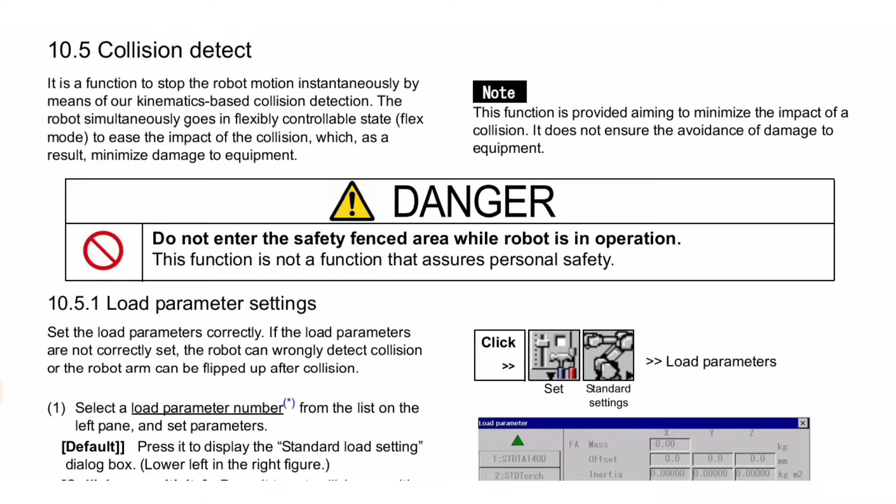Note: this function is provided aiming to minimize the impact of a collision. It does not ensure the avoidance of damage to equipment. Danger: do not enter the safety fenced area while the robot is in operation. This function is not a function that assures personal safety.

Next is load parameter settings. Set the load parameters correctly. If the load parameters are not correctly set, the robot can wrongly detect a collision, or the robot arm can be flipped up after collision. First, select a load parameter number from the list on the left pane and set parameters. Default: press it to display the standard load setting dialog box, lower left in the right figure.

Collision sensitivity: press it to set collision sensitivity, setting range 0.0 to 100%, 100% for the most sensitive level. Second, set parameters and click OK. Note: setting the collision sensitivity higher not only increases the collision detect sensitivity but also increases the flexibility of the flex mode after collision. Therefore, distortion of equipment caused by the collision can be relieved.

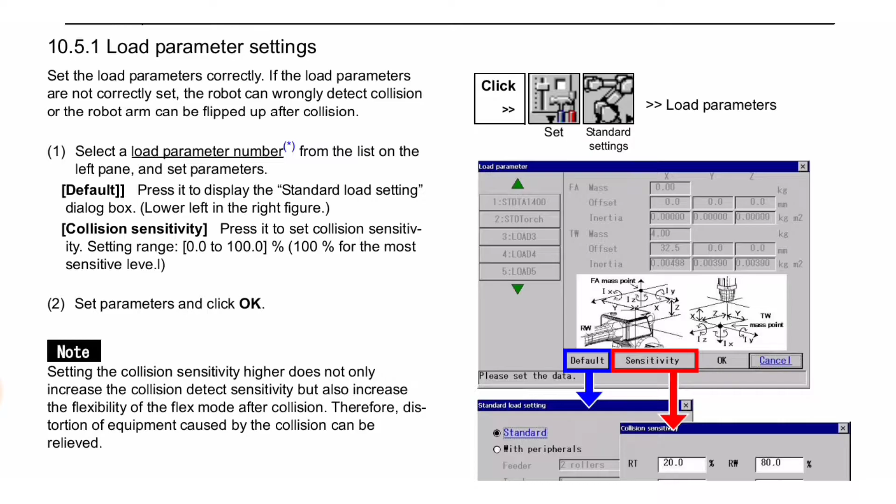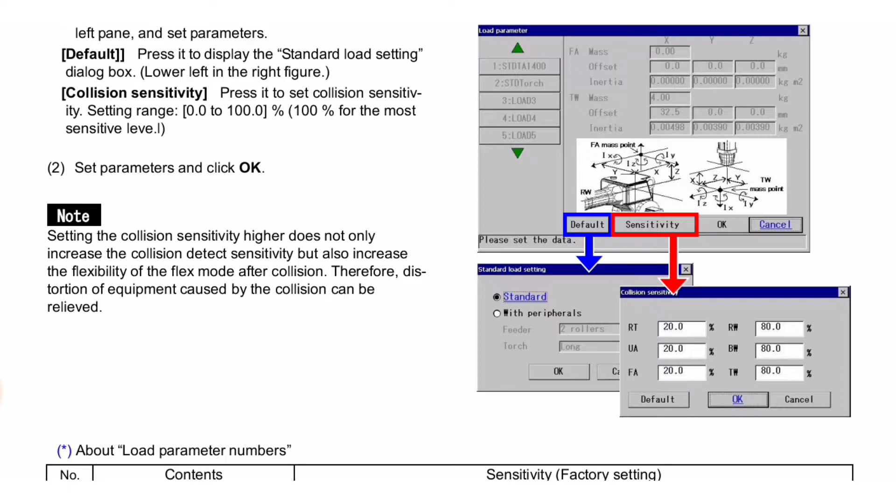Friends, you can see the load parameter settings procedure in this image. Here you can see click set, standard settings, load parameters, and the further procedure of load parameter settings. Next you can see a table about load parameter numbers, which contains sensitivity, that means factory setting. First is standard load parameters, 0%. Although the collision detect is effective, there is almost no flexibility.

Second, standard load parameters with peripherals, that is our standard torch and wire feeder: RT, UA, FA 20%, RW, BW, TW 80%. Lower the sensitivity if a false detection occurs under the following conditions: crooked torch cable or torch cable contact. Start of operation immediately without warming up in a cold temperature environment. In weaving operation, large values are set to frequency and width.

In arc lift function, large values are set to the up, width and/or lift down time. Singular orientation exists in the programmed movement. Load other than our standard equipment is installed to the robot. Correct the load parameters, 3 to 6. They are factory set to load parameters 1 or 2. If you want to increase the collision sensitivity, use one of the parameter numbers 3 to 6 according to the applied load and set the load parameters correctly.

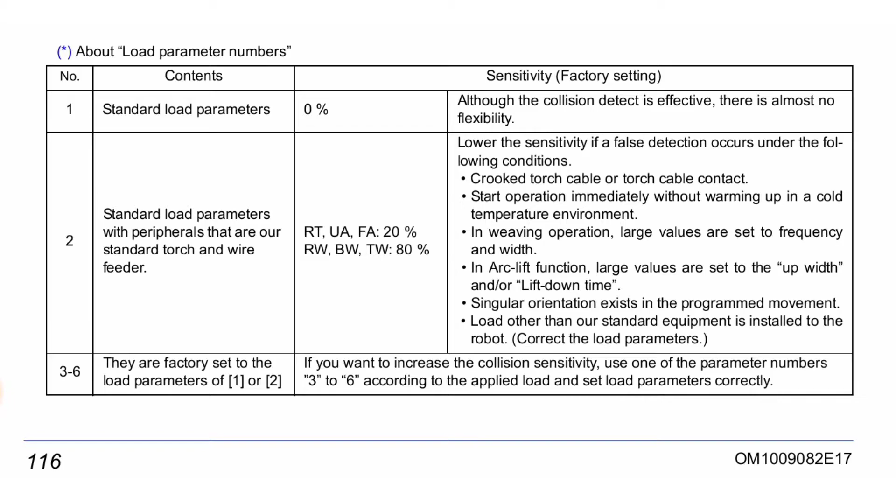Next is a note: if the collision sensitivity is set higher than it should be due to wrong load parameters, or if it failed to update the load setting in the program with the load command. When the mass at the tip of the robot is significantly changed due to the opening and closing operation of the grippers or so, the gravity compensation in flex mode may not work properly. As a result, the robot loses its gravity balance.

Be aware that once the robot loses its gravity balance, the robot may be continuously in motion even after passing the collision point. If the robot passes the collision point significantly, the error E7053, collision detect hold limit error, occurs and the servo power is shut off.

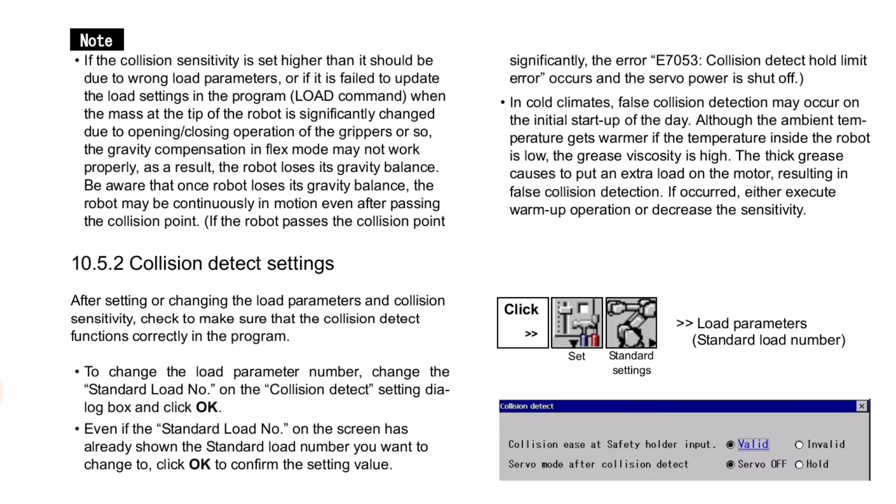In cold climates, false collision detection may occur on the initial startup of the day. Although the ambient temperature gets warmer, if the temperature inside the robot is low, the grease viscosity is high. The thick grease puts an extra load on the motor, resulting in false collision detection. If it occurs, either execute a warm-up operation or decrease the sensitivity.

Next is collision detect settings. After setting or changing the load parameters and collision sensitivity, check to make sure that the collision detect functions correctly in the program. To change the load parameter number, change the standard load number on the collision detect setting dialog box and click OK. Even if the screen already shows the standard load number you want, click OK to confirm the setting value.

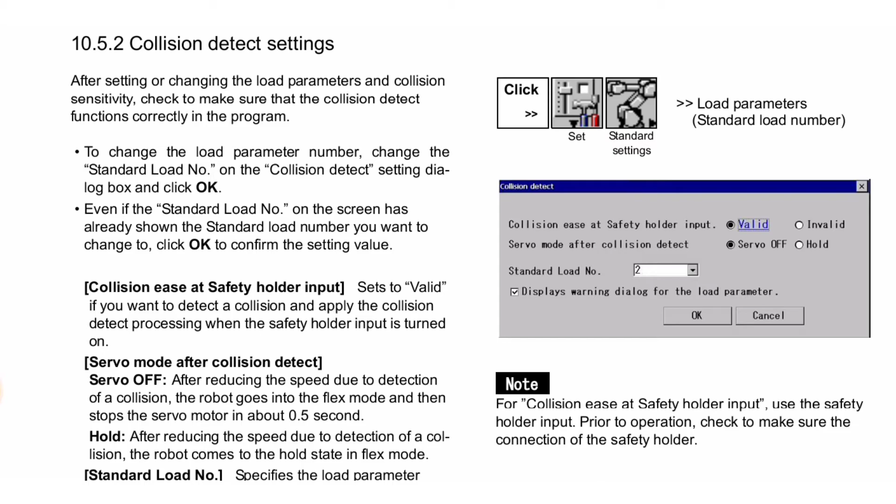Collision ease at safety holder input: set to valid if you want to detect a collision and apply the collision detect processing when the safety holder input is turned on. Servo mode after collision detect. Servo off: after reducing the speed due to detection of a collision, the robot goes into flex mode and then stops the servo motor in about 0.5 second. Hold: after reducing the speed due to detection of a collision, the robot comes to the hold state in flex mode.

The standard load number specifies the load parameter number to be applied when the load command is not executed. When the load command is executed, the load parameter number specified last is applied. You can see all this procedure in this image.

Collision detect. Collision ease at safety holder input: valid, invalid. Servo mode after collision detect: servo off, hold. Standard load number 2 displays a warning dialog for the load parameter. OK, cancel. Note: for collision ease at safety holder input, use the safety holder input prior to operation. Check to make sure of the connection of the safety holder.